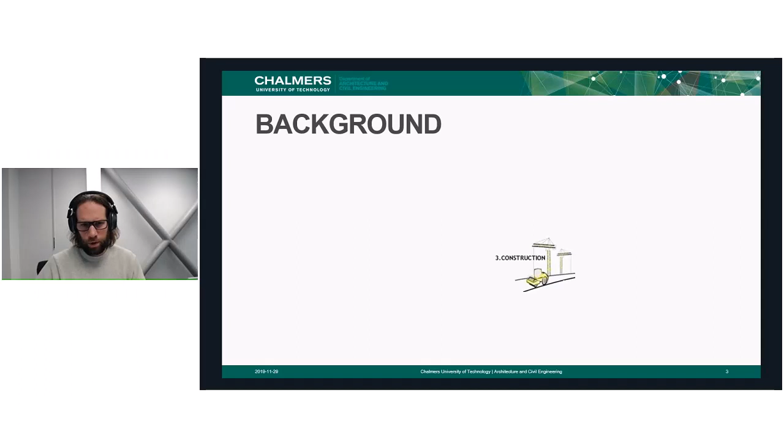Yeah, there's a bit of a glitch in the slide. I don't know, because the thing doesn't show up the way that I was hoping for. Yeah, now I think it's showing. Okay, but just go back to slide number 2. Yeah, because the problem is it doesn't follow the same graphs that I was hoping for. It's a bit weird. Anyhow, hope it's gonna be okay.

So it's hard to imagine a day with no road infrastructures. They are so important for us that their inexistence would paralyze the existence of our society and civilizations. Therefore, a high amount of investment every year is allocated to sustain the existing infrastructure to assure that we get the service we need. Beyond that, fresh investment every year is allocated to upgrade the system and create added value to the existing infrastructure that we have. However, due to constant need for construction and maintenance activities, a high amount of natural resources is extracted from our finite planet, and down the road more materials become scarce. Due to these constant maintenance activities, more waste is generated that pressures our ecosystem. Therefore, it is very important to take a systematic approach, aka life cycle thinking, to assure that we tackle all these aspects and avoid partial thinking and problem shifting later on.

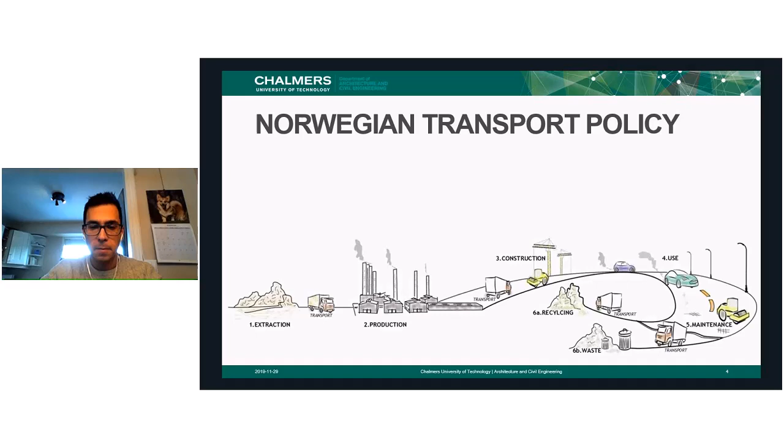Do you all have it? Yes, you can see it clearly now. Okay, perfect.

Norway is a country of about 5.3 million people, and the majority of the population is located around the coastal area. Road infrastructure plays a fundamental role for Norwegians to get closer together, and having a secure and effective road infrastructure supports the socio-economic activities in Norway. As a matter of fact, about 88% of the transportation in Norway happens on road. Over the last years, the road network has expanded continuously, and at the moment we have a total length of 93,000 kilometers of public-owned road.

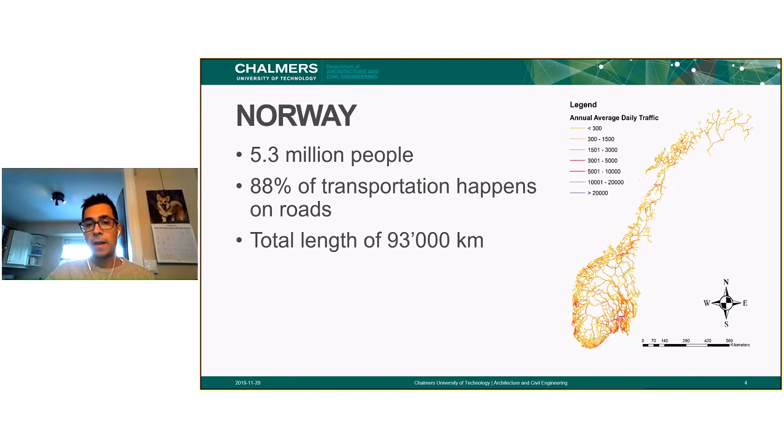Due to the importance of road infrastructure, the Norwegian government also aims to spend a staggering amount of Norwegian kroner over the period of time to assure that they increase the safety, efficiency, and effectivity of the transport while modernizing the infrastructures. They focus on different areas, but regarding environmental concern, the government likes to cut carbon emissions by half by the end of 2030, and this should be achieved from both construction and maintenance works.

Beyond that, due to the constant expansion of the network and increasing technical requirements, road infrastructure hasn't been maintained as it should have been. Because of that, the maintenance delay in the network has increased, and this is one of the aims that the government hopes to achieve in the coming years: to close the gaps and reduce the maintenance backlog or maintenance delay in the network.

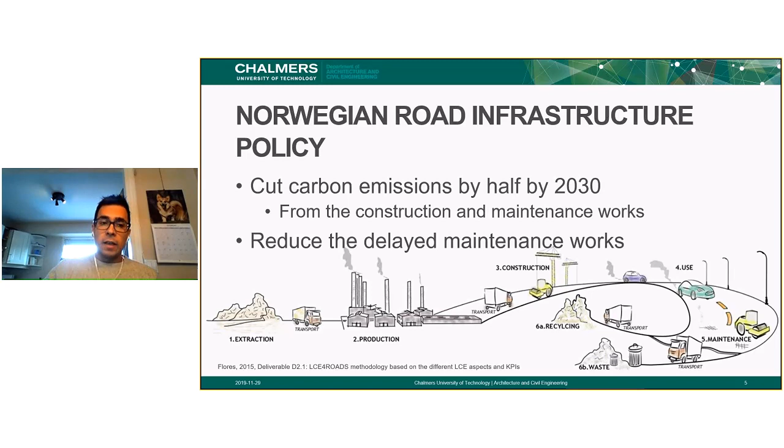The aim of this research was to explore and gain a deeper understanding of the life cycle of road infrastructure, and at the same time apply a systematic approach and propose solutions that close the research gaps. This has been done using the Norwegian road network as a case, while trying to keep the results as generic as possible so they can be used for other cases.

In order to reach the aim of the study, I carried out literature studies to see what the missing points were. In doing so, I was using research in the domain of environmental and economic assessment of road infrastructures, and tried to find areas that have high potential and create added value for future research.

Looking at the environmental impact assessment of road infrastructure, LCA has been used for almost two decades, with studies using different approaches to showcase results. Over time, the resolution of LCA has increased significantly due to better representative data. However, prior studies tend to use generic data showing industry average data on a global scale while presenting impact assessment for a particular local case, meaning they were using global data to show a local problem.

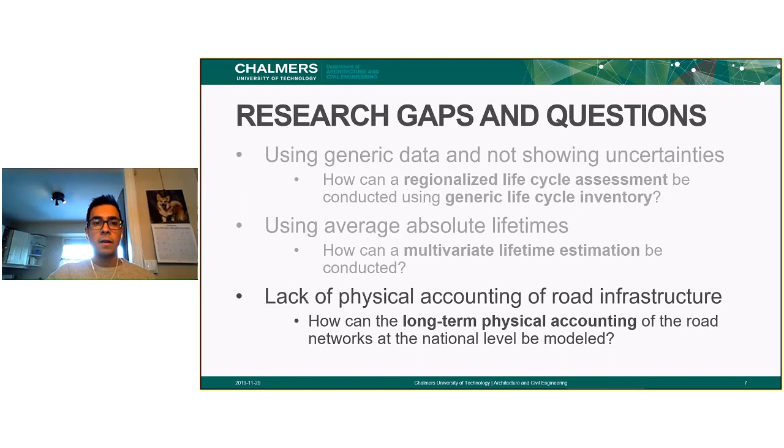To scope the research, I focused on certain areas for the life cycle assessment. When I wanted to show how we can create a regionalized life cycle assessment among different product systems, I focused on construction materials. There were various reasons I picked construction materials as a product system to show how regionalized life cycle assessment can be done, and how we can address the uncertainties.

Construction materials, if you look at the literature, are responsible for about 15 to 30% of climate impact. At the same time, these impacts are directly related to operations during earthworks, such as cut and fill and transportation of materials, and they also contribute to embodied impacts when we are quarrying materials.

If we think of minerals used for construction of road infrastructure, we can see that construction machinery accounts for about 50% of the impacts embodied in producing minerals like aggregates or other materials.

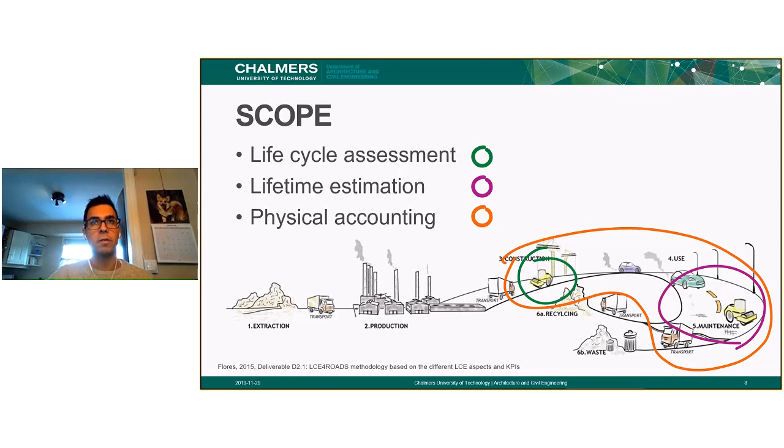Regarding physical accounting, which was about how much material we have in the network, I looked at the whole value chain from construction material usage and end of life through to maintenance activities. We focused on that domain while looking at the entire road network in Norway.

To answer the first research question—how can a regional life cycle assessment be conducted while using generic life cycle inventory—we were fortunate to have access to nice data compiled by the Norwegian Association of Heavy Equipment, showing how construction machinery has been operated in Norway.

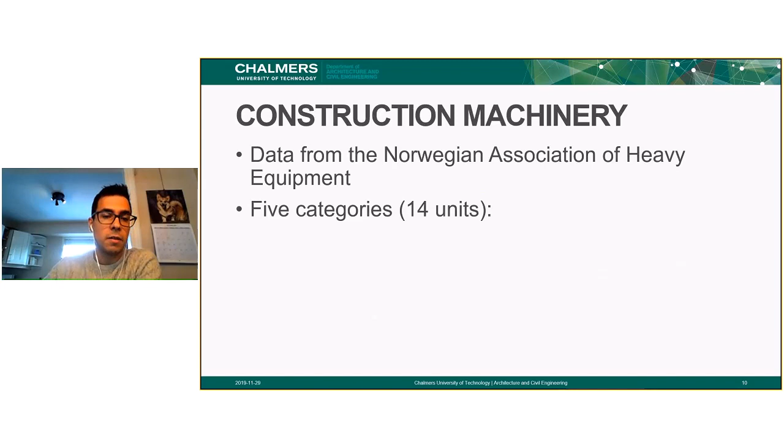There were many machinery types, but we focused on 5 categories of road construction machinery, and in total we looked at 14 units. These construction machines were: articulated hauler, motor grader, wheel excavator, wheel loader, and crawler excavator. So these were the 5 categories that we looked at.

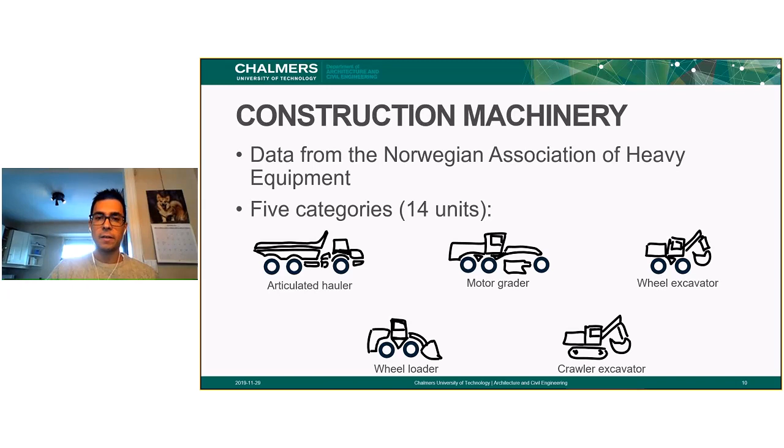When performing the life cycle assessment, we decided our system boundary was from extraction of raw material to pre-manufacture, and transport of material to the factory to assemble the construction machinery, until the time they are decommissioned and need to be disassembled for waste management at the end of life. Meaning we carried out the full life cycle approach, from cradle to grave, of each construction machinery.

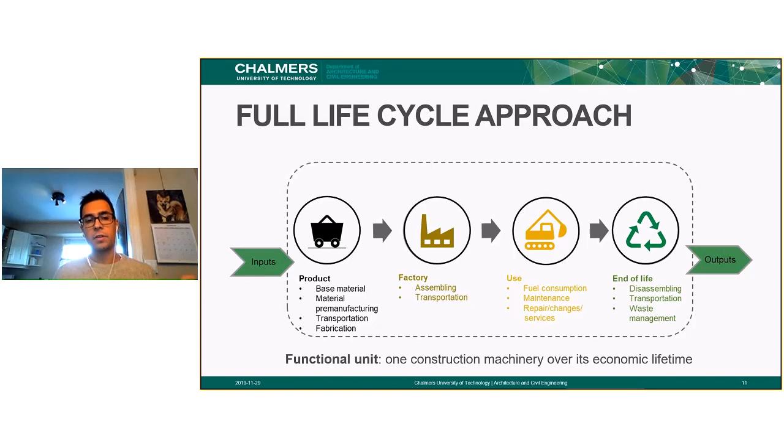The functional unit we used was one construction machinery over its economic lifetime. This functional unit was used to show the total impacts of the construction machinery for each type.

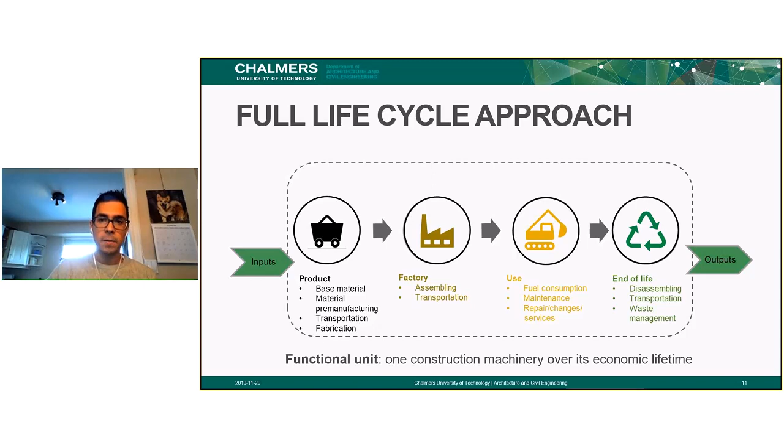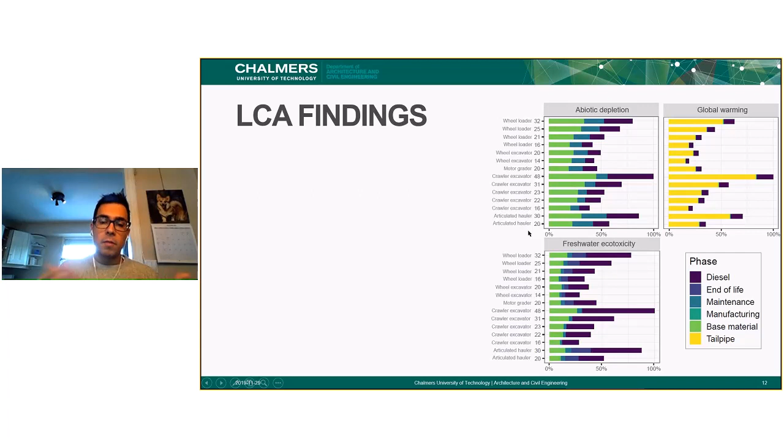By going into the results, we saw that the weight of machinery has an impact on the total impacts that come from a machinery. In other words, if we have a higher operation weight, we have higher environmental impacts. You can see that an excavator which is 48 tons has in fact higher impact compared to the lower operating weight construction machinery. The reason for that was related to having the higher mass of materials used, and also the higher engine capacity that this construction machinery had. Which brings us to the next point.

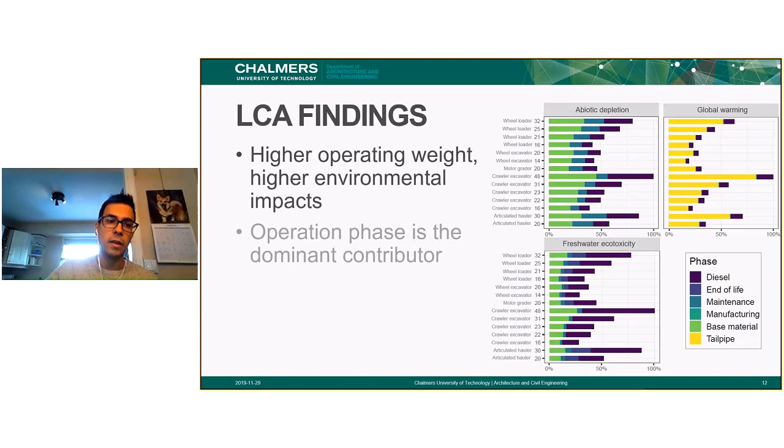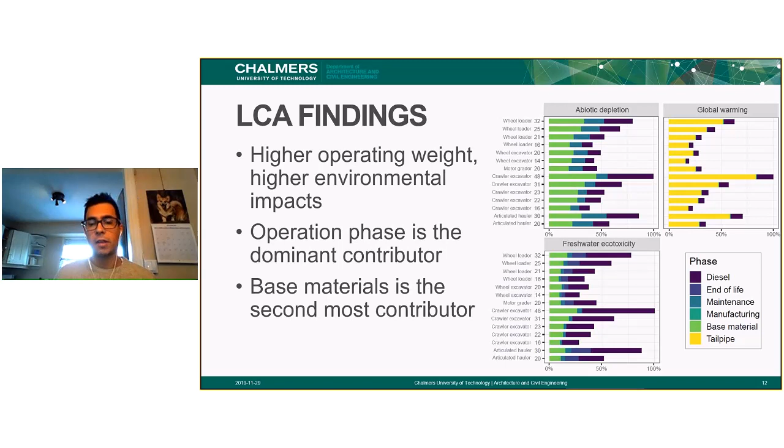The operation phase showed that it was in fact the dominant factor among all impact categories we were focusing on, meaning that the amount of fuel used and the tailpipe emissions in the total results were the dominant phase of a construction machinery causing the high impact over the full life cycle of each construction machinery. However, base material was the second most important contributor, due to the assembly of the materials and also the sequential repair and services needed, like changing parts, filters, oil, etc.

However, in this study, we also found that the end of life phase, which is often discussed as the least important phase of a construction machinery or any kind of product because there isn't much going on there, depending on the scenario we use for how waste material needs to be treated, the end of life phase might have a contribution.

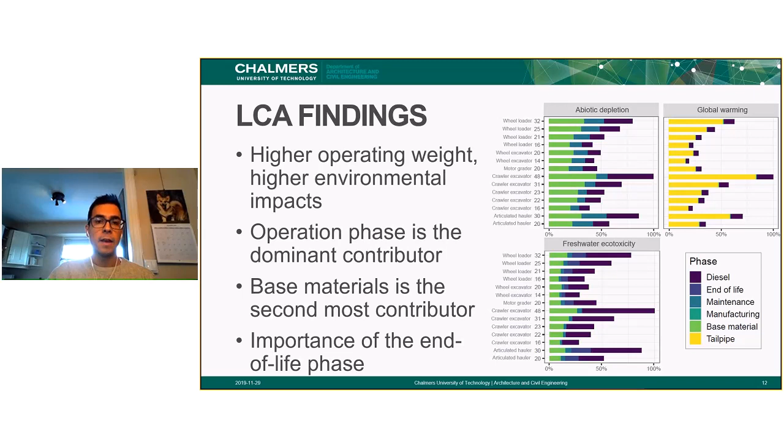Here we can see the freshwater ecotoxicity, because of the scenario we use, has a contribution from end of life of material. In the assessment, we consider that at the end of each tire's life, when the tire is worn out, it is used as an energy source for producing cement. Because of that kind of scenario, we can see that the end of life phase is not insignificant with respect to the impact, and has a contribution over the full life cycle of the machinery.

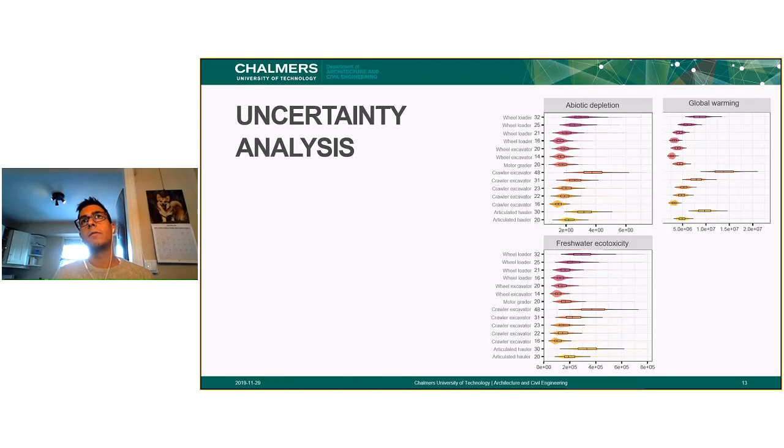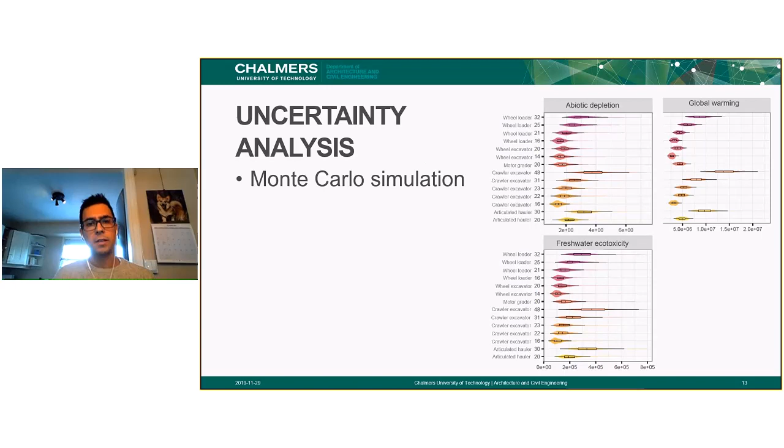And more than that, we were thinking of carrying out an uncertainty analysis to show the accuracy and reliability of our assessment. In doing so, we did Monte Carlo simulations for all of these machines, and we iterated over 1,000 times.

Here we show the results, the same table but from another angle. We show the total impact with respect to each construction machinery, using box plots and kernel distribution plots to show the intensity and probability of the impacts. If we look at the median value of these impacts, which is the middle of the box plot, we can still get to the same conclusion that the heavier the machine is, the higher impact it has.

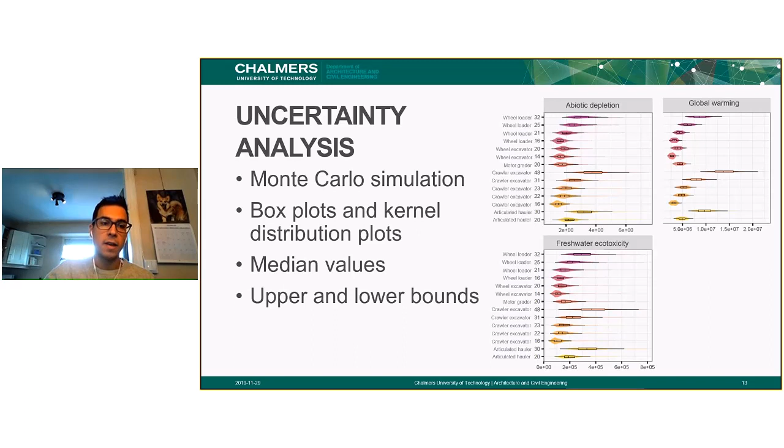However, if we look at the upper and lower bound of each distribution, we cannot say with 100% certainty that the heavier a machine is, the higher impact it always has. Meaning that with some percentage of certainty, we can say a particular machine is often having a higher impact. This brought me to the point that performing uncertainty analysis gives us an opportunity to look at the picture from another angle.

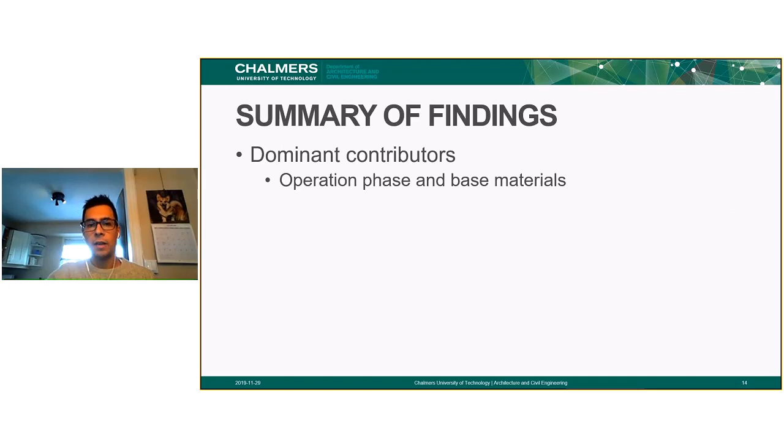And say how certain we are with these kinds of single values we provide in the impact assessment. To summarize our findings, the dominant contributors in this study were the operation phase and base materials among all impact categories. It was also an important finding that carrying out a full life cycle assessment gives us a better picture, and with respect to the scenario we pick, inclusion of the end of life phase actually matters, because it gives us a better picture of how waste treatment might impact the whole lifetime of the product from a full life cycle perspective.

And also, we found that it is necessary to perform the uncertainty analysis to get a better picture of the reliability and accuracy of our decisions when determining what the impacts associated with the product would be.

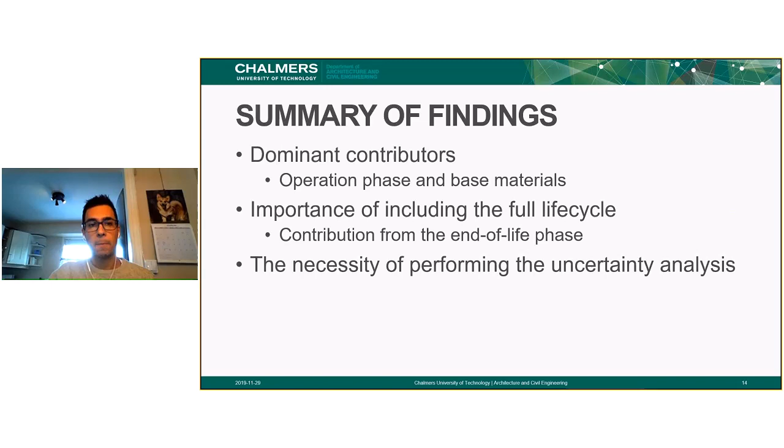Regarding the second research question, that was how can a multivariate life cycle estimation be conducted? Well, we focused primarily on pavement materials, or more specifically only asphalt bituminous material. We focus on only the estimation of these kinds of material.

The approach we took was collecting data. First, we needed to do the data engineering, because we used data from the Norwegian road depository, the road data bank depository, to prepare the data for post-processing and statistical assessment. I did the fetching, cleaning, and merging of different datasets from this depository that I had access to. I also used spatiotemporal analysis to overcome some of the limitations embedded in the database, to join and harmonize the data.

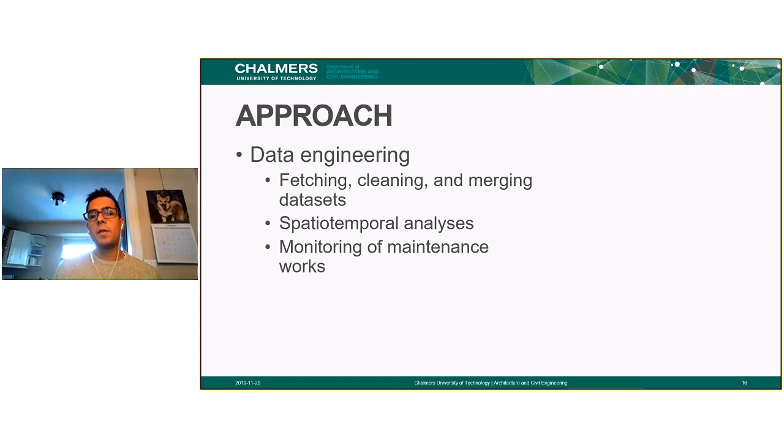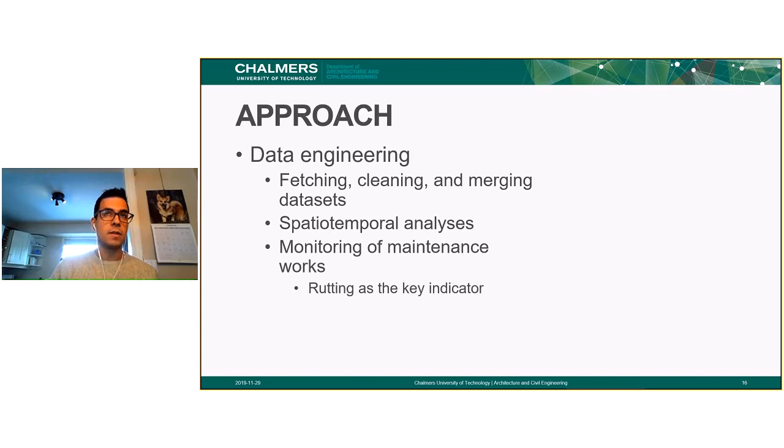I also monitored the maintenance works. There were some issues with the database, because not all maintenance activities have been registered in the Norwegian road database. So in order to monitor how maintenance activities have been done over the last couple of years, I used a specific measure to cross-validate the recorded maintenance activities. The variable I used for cross-validating the recorded maintenance was a pavement distress measured by the Norwegian Public Road Administration, which was Rutting.

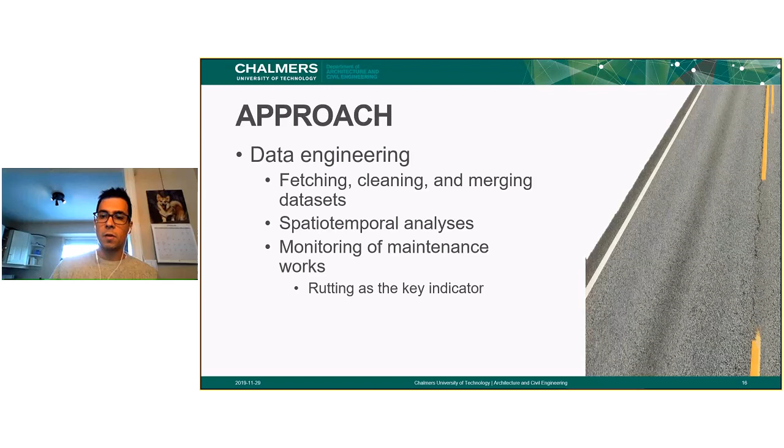If you do not know what rutting is, if you look at the road, rutting happens. It's a distress that creates a deformation on the pavement with such a profile, and happens across the wheel path of a road. You can see it in some roads, some are very severe and some are not so severe.

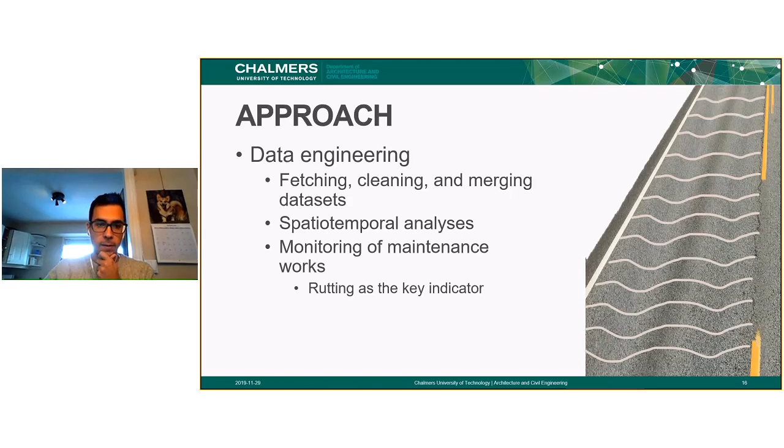That was a response variable. This rutting was a response variable that we used to cross-validate the recorded maintenance activities. For the statistical model, I used survival analysis to estimate lifetime, and among different survival models, I used the Cox proportional hazard model to do the semi-parametric analysis of the data.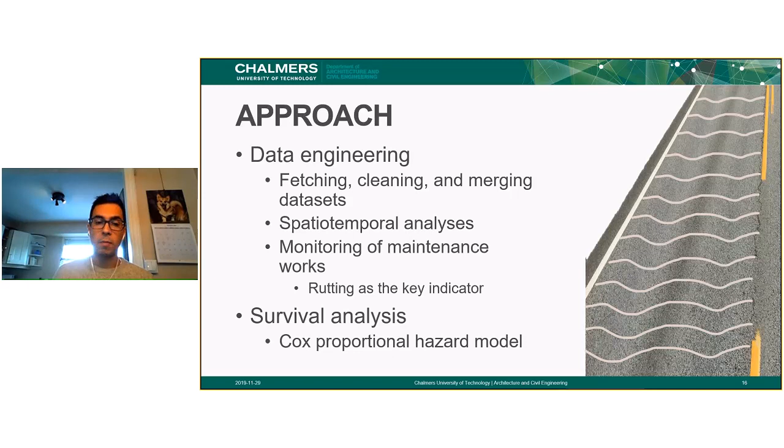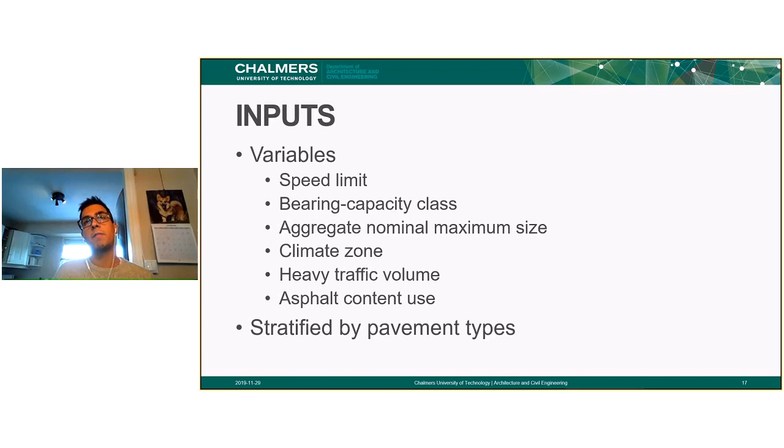Various inputs were considered. This was a regression model, so I used different variables to check the effect of different factors on the lifetime of each pavement. These were the variables I considered, and I also stratified my assessment, meaning I grouped each assessment based on pavement types, comparing each pavement's performance relative to each other.

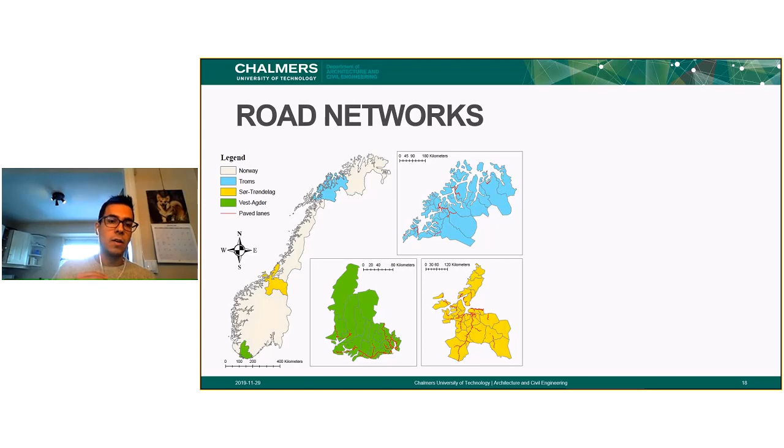The data I collected came from three counties in Norway: Troms, Sør-Trøndelag, and Vest-Agder. I picked these counties because of the considerable climate difference. If you look at the average outdoor temperature for these three counties over the last 10 years, you can see they have almost a 4 degree temperature difference.

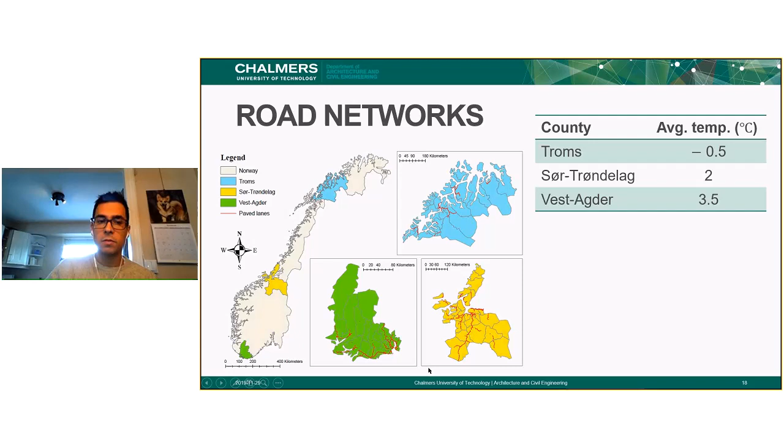There were also different road networks in the system. The red paved lanes are the roads I considered for the estimation of lifetime. These roads were chosen based on an annual average daily traffic that fell between specific ranges.

I chose these roads because rutting was shown to be a very good indicator—rutting is a pavement distress that happens in roads within this range of traffic volume. More than that, I classified the roads with respect to classes introduced by the Norwegian Public Roads Administration.

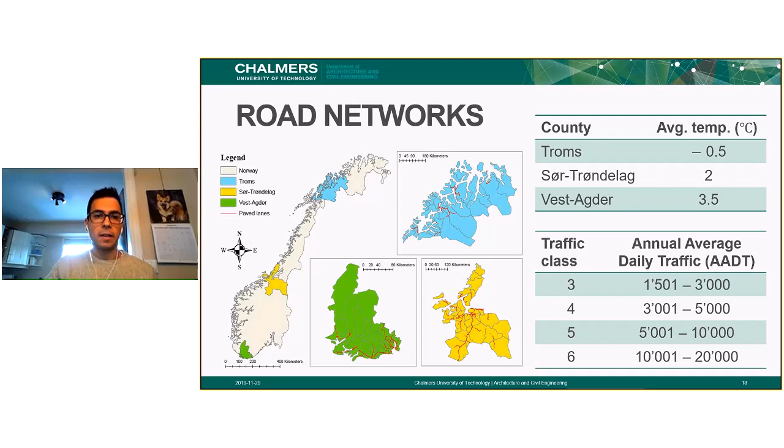So what do the actual results show? First, I wanted to do the non-parametric analysis, to show how maintenance activities have been done, meaning what the maintenance records were. I also wanted to look at the technical requirements set by the road directorate, to see how much sooner maintenance should have been done—meaning what the gap is between technical requirement and maintenance records.

If we look at the mean survival probability and the difference, we can see that maintenance activities have been delayed for almost 2 years for each traffic class, relatively. This aligns with the Norwegian National Transport Plan, which discusses delays in maintenance activities. We can also see that if we follow the technical requirement, we should have maintained the roads at least 2 years earlier than what we actually did.

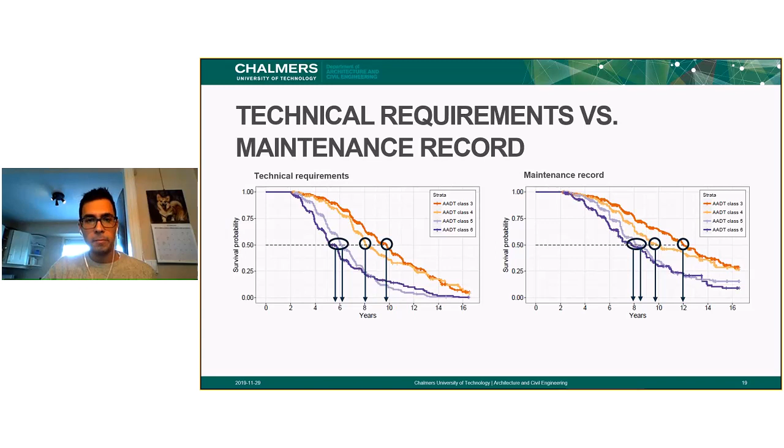Another finding, from the Cox proportional hazard function, was the effect of different variables. The variables that were constantly significant across all traffic classes were aggregate nominal maximum size and heavy traffic volume—meaning these two variables consistently showed a low p-value across all classes.

However, I saw some uncanny results in the data. If you remember, one variable that I considered was a speed limit. Sometimes in one traffic class, increasing the speed limit resulted in a shorter lifetime of a pavement, but often the opposite also happened, and sometimes it was really unproportional. So the profile of the increase or decrease in the speed limit did not match the expectations. So therefore, we used another explanatory variable to see what is the reason for it.

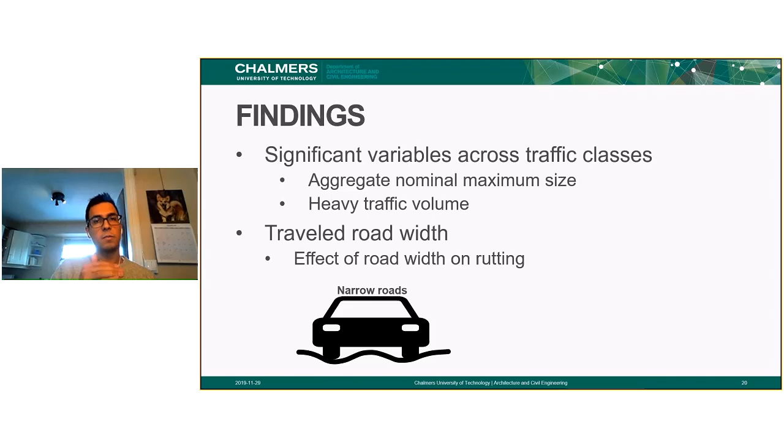After a discussion that I had with the road directorate, it became clear that it might be due to the traveled road width. And therefore, I considered this variable to dive deeper into the data. And surprisingly, we could see the effect of road width on rutting, meaning that when we had a narrower road, the depth of a rut profile gets deeper and narrower. And when we have a wider road, the profile gets more relaxed, the depth is shallower, and the spread and width of a rut is also wider.

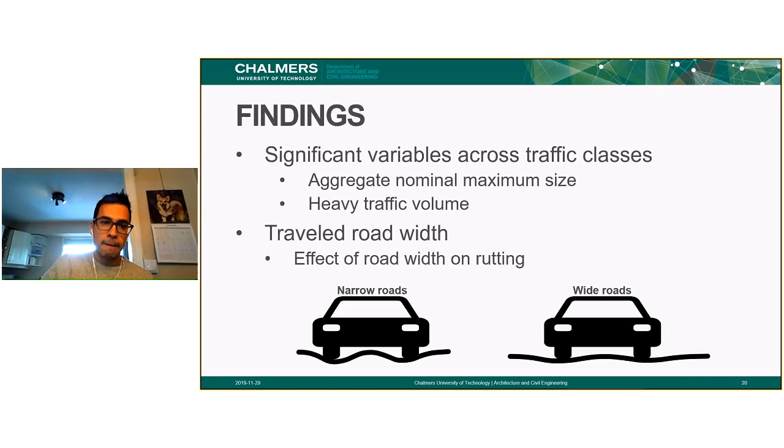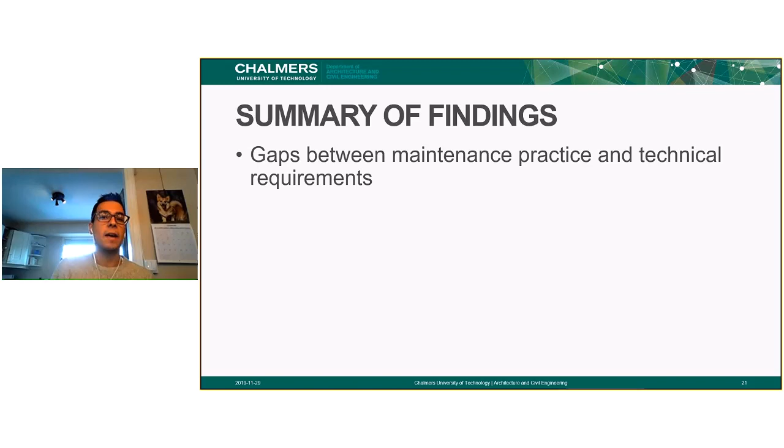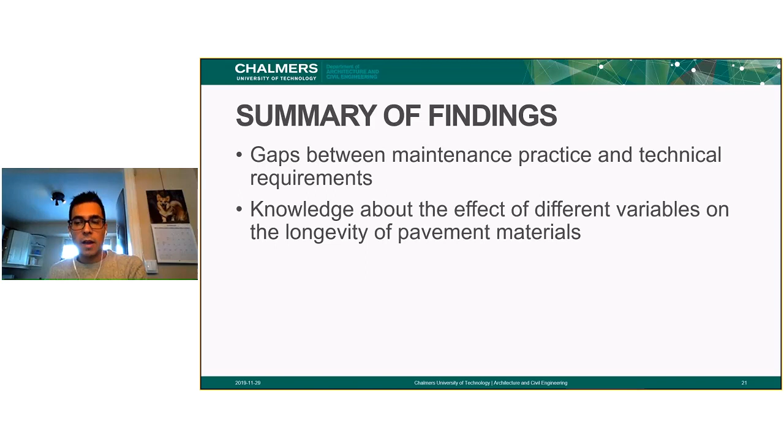To summarize the findings, we were able to show the gaps between the maintenance practice and technical requirement. Based on the model and the data cleaning, we could show what the gap actually is between the maintenance practice and technical requirement. And also we were able to see the effect of different variables on the longevity of pavement materials, and to get a better understanding about the lifetime of the materials, when we are using these values later on for any kind of assessment and having more robust decision making.

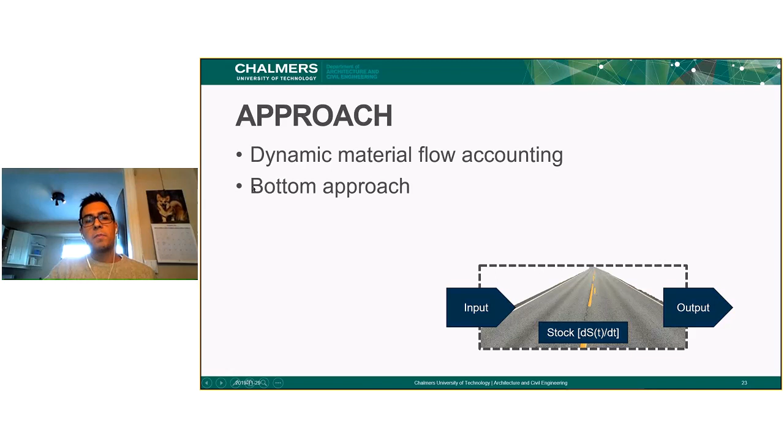Going to the third research question: how can the long-term physical accounting of the road network at the national level be modeled? In doing so, we decided to carry out dynamic material flow accounting. Flow accounting in the sense that we wanted to follow how much material goes into the system, goes out of the system, and how much stock we have. A stock here is the position of material over time. And by dynamic, we mean the relative changes in the amount of stock, meaning how much is being added or left from a system throughout the time. To do that, I used a bottom-up approach, meaning that I collected information from all the road networks in Norway and aggregated all the information to show how the stock is on the network.

However, there are many roads. Here I just focus on three categories of road that the Norwegian Public Roads Administration is responsible for: European road, national road, and county level road. So in total, about 55,000 kilometers of road was studied in this research. And more than that, I focus on the retrospective and prospective. Retrospective in the sense of how the road network has grown over the period of time until the present, and prospective, meaning how the material consumption might be in the future. So retrospective looked into the past and prospective looked into the future.

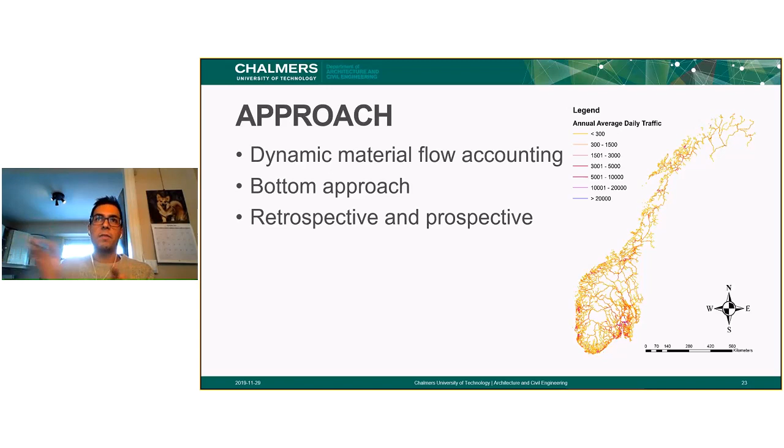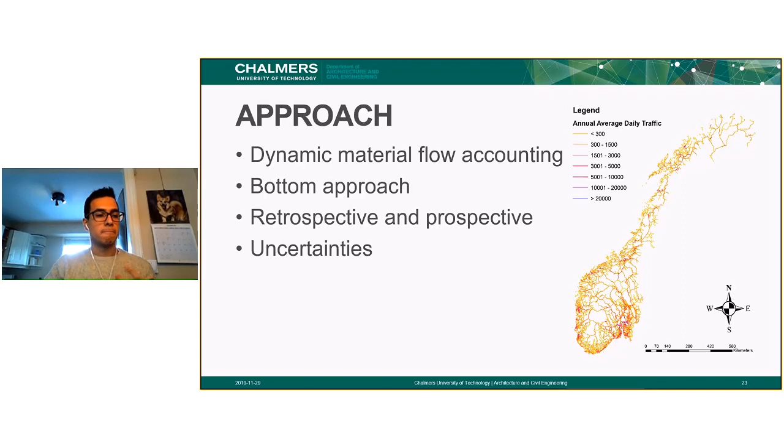The period of assessment that I considered was from 1980 till 2050, and I had data up to 2017, meaning that for the retrospective I considered only 37 years, and for the prospective it was 32 years of analysis. And I also considered uncertainties to avoid providing single values. So I wanted to carry out uncertainty analysis of the data to show the reliability and accuracy of the data.

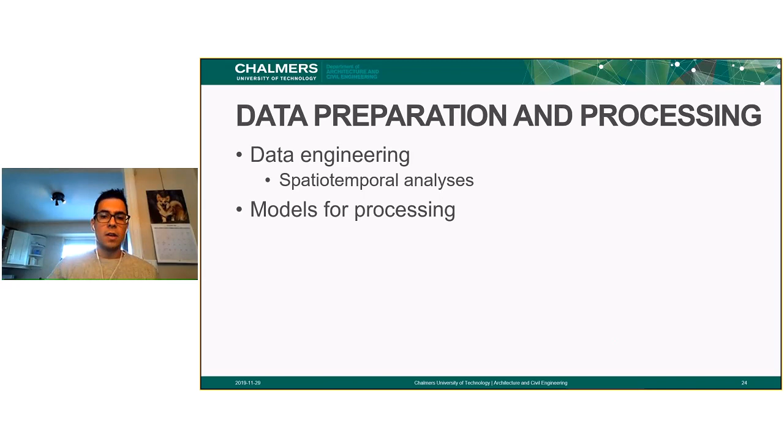Like the previous research question in lifetime estimation, I needed to collect the data and do the data engineering. Here was massive data engineering, doing a spatiotemporal analysis to prepare data for post-processing. In the post-processing, I used different kinds of models. One of them was a classification and regression decision tree model to predict the layer composition of each road section. I used this decision tree model to train on the data and then predict for the other sections that we didn't have information for, with respect to different variables that I considered.

Other than that, I considered fitted survival analysis based on the knowledge that I attained from the previous research question, lifetime estimation, with respect to various variables. I was able to carry out a survival analysis and fit a distribution model to see what is the probability of material with respect to their longevity. And more than that, we used empirical pavement wear, meaning what is the effect of tire-pavement interactions and how long pavements would last in our system, how pavements are dissipated from our system.

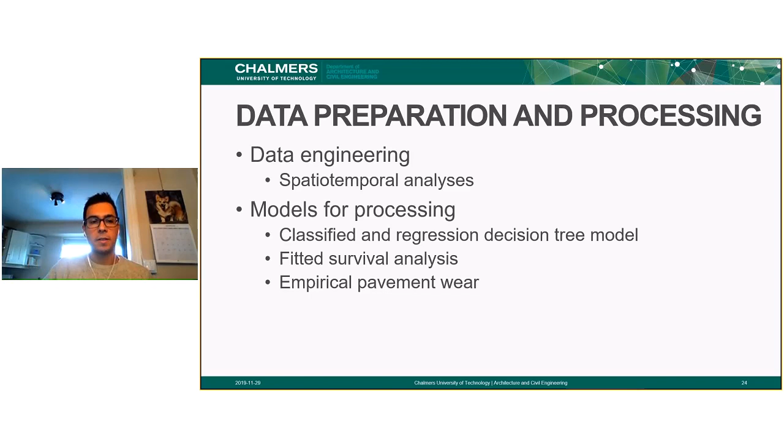And beyond that, I consider different scenarios: 0%, 1%, and 2% annual increase for the traffic volume for each section, meaning how the increase in each section under different scenarios would affect the maintenance requirements. And I should say that for the prospective, I did not include the effect of expansion of the network because I did not have any information about it.

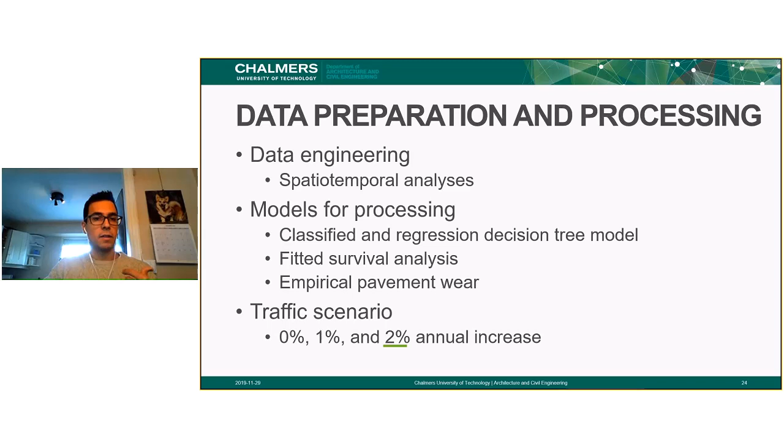But the prospective here only focused on the preservation of the network, meaning that we consider periodic maintenance activities that need to be done on each pavement section. And more than that, the results that I'm going to show are for the 2% annual increase scenario.

So the retrospective, like I said, was between the 1980s and 2017. And this is what the results show. Here, the blue bar chart is how much material was input to the system. The yellow bar chart means how much material left the system, and the red line is how much the network expanded with respect to the material.

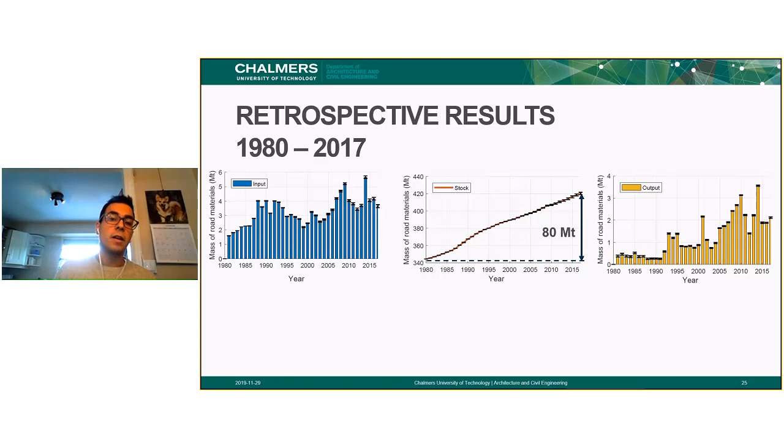And if we look at the difference between the 1980s and 2017, we can see that the amount of stock in the network increased by 80 megatons. And the reason for that was the maintenance work, meaning that maintenance work was responsible for 3/4 of the total growth in the stock, and the rest, 1/4, was due to the expansion of the network during the same time period.

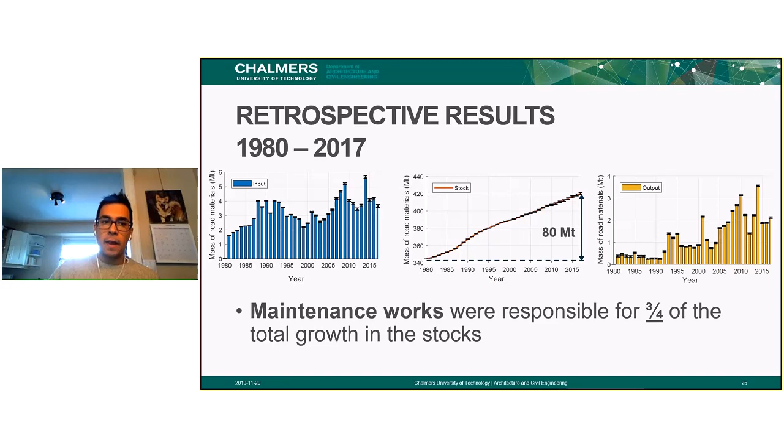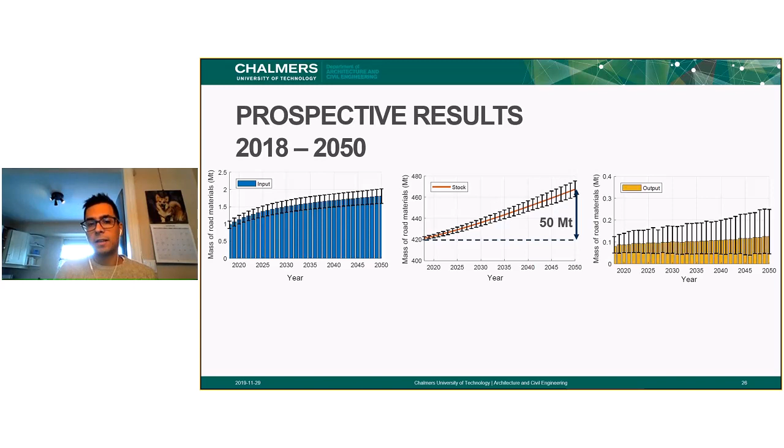And when we look at the prospective results, from 2018 till 2050, we can see that over 32 years, it is expected that the amount of stock would increase by 50 megatons. And as I said, maintenance works and pavement wear were the only variables discussed in this analysis, meaning that we did not consider the effect of network expansion, rebuilding and reconstructing, or building new roads in the system.

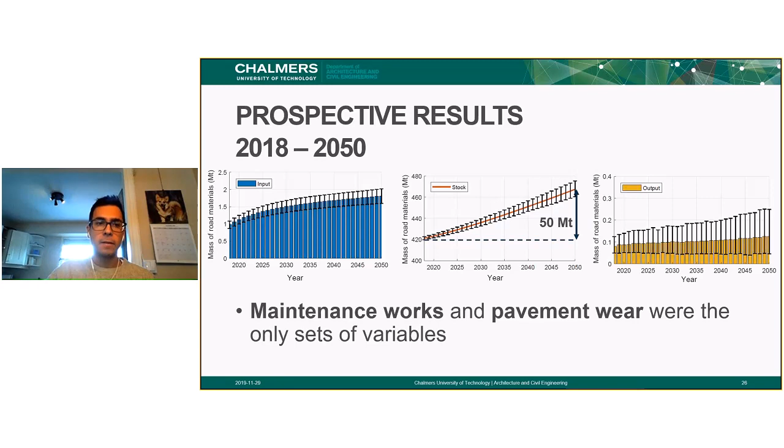And to summarize the findings, the material stocks of road infrastructure would continue to grow, and maintenance work showed to be the main contributor. Based on the retrospective results, 3/4 of the impact was coming from maintenance activities. And because of the current condition of infrastructures and the importance of road infrastructure, maintenance activity would still play a fundamental role in the consumption of raw materials, like minerals or any kinds of bitumen.

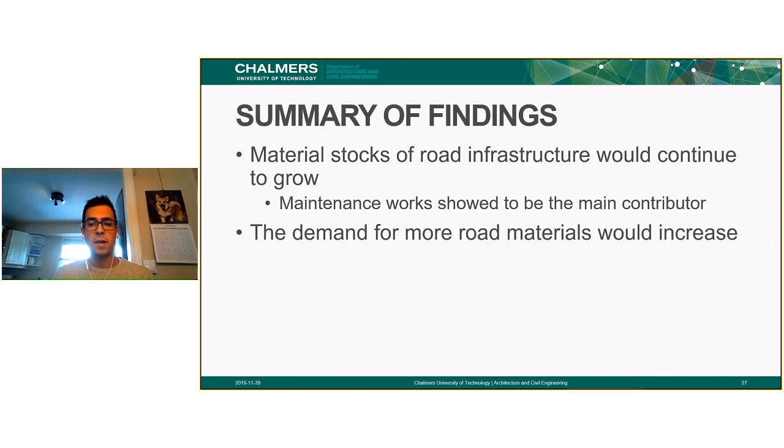And more than that, we saw that the demand for road materials would increase. Due to the constant growth in maintenance activities, and if we probably have road expansion, we definitely need more material for expansion of the system.

To conclude the results and findings from these 3 research questions, this research recommended approaches based on the gaps that we found within the scientific literature, and also the potentials we found with respect to the Norwegian road infrastructure policy through the National Transport Plan.

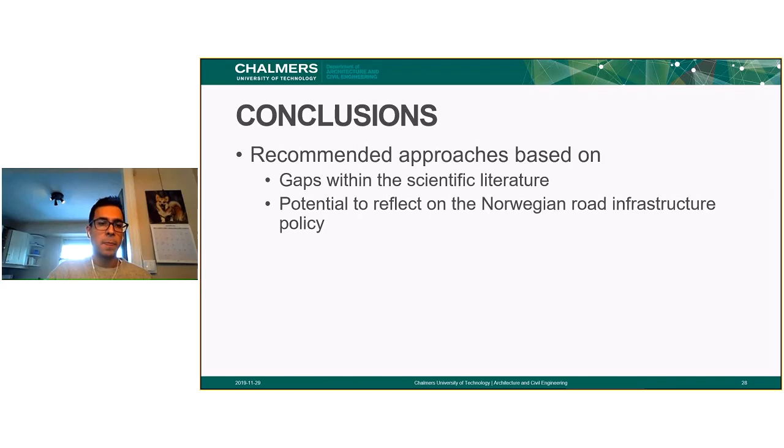And for that, we focus on the life cycle assessment of construction machinery to show how we can create a regionalized study while showing uncertainties, and we focus on construction machinery because it is a key element that we can use as a baseline when using other scenarios to achieve the 50% cut in climate impacts from construction or maintenance activities.

And more than that, we use the estimation of pavement lifetimes to first show how it's possible to estimate the lifetime of materials, and second, to improve the robustness of the analysis and improve decision making.

And also, we use this modeling of long-term physical accounting to get an idea of how much material actually exists in the system. And if we're going to do urban mining in the future, we get some idea of how much material we have in the network, and maybe we can reuse, recycle, or repurpose this material for other kinds of construction activities later on.

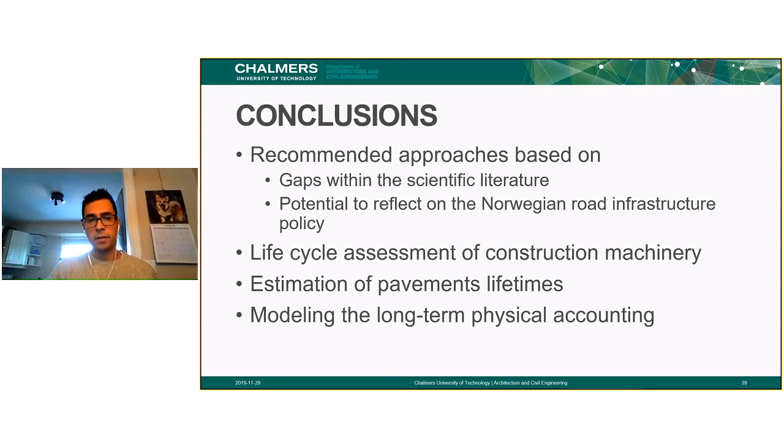This study wasn't without any limitations. I should say that here I only focus on open road infrastructure to answer these research questions, and also I focus on the current state of road infrastructure. So I didn't consider any modern cutting-edge technologies that are still on a laboratory base. What I considered was the current practice in road infrastructure construction and maintenance activities. And also I use different methods and models.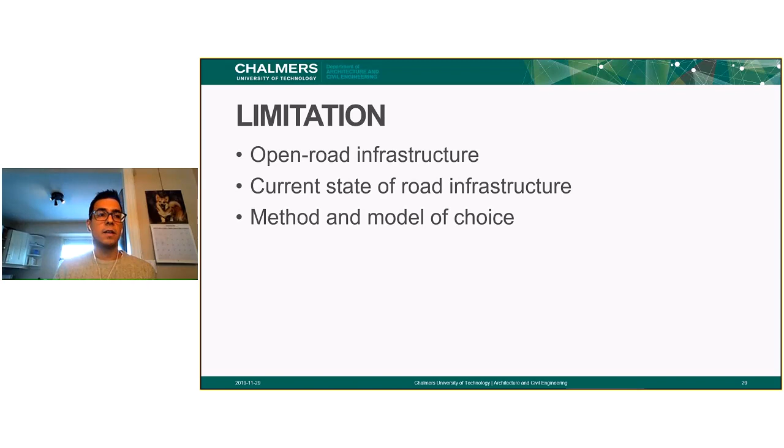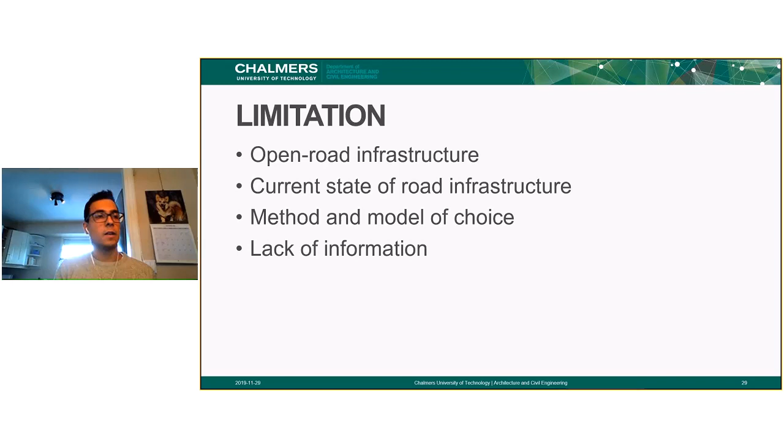However, there are many more that can be considered. These models and methods that I chose were based on the literature, their significance, and the potentials that I observed through the literature. And also there was some lack of information that stopped me from doing more. So because of that, I wasn't able to do everything. Like this stock modeling of the road infrastructure, I couldn't do it for the entire road network because the data weren't there, or we didn't have enough information to carry it out.

But about future research, I should say that life cycle assessment has been done for a while, and it becomes more prominent in the future. However, the current LCA study is incapable of integrating risk assessment. This is due to the inability of LCA to capture the availability of abiotic resources from the site of production. The current LCA study can show the consumed mass, energy, and geological depletion, but it is incapable of showing the supply side risks.

To answer these limitations in the current LCA study, it might be beneficial to consider the economic scarcity potential or geographical supply risks to increase the reliability of the LCA study that we are carrying out. More than that, it's going to be very important to perform optimization studies to answer these multi-objective issues that we always have. We want to reduce the cost, reduce the maintenance, while improving the quality of the network, and so on. It's really important to carry out these kinds of mathematical models to get the most optimum for the money spent.

and show how the maintenance activities can be done more from a network perspective. That's what I'm hoping to achieve in a short time, to actually show the potential of my results and findings in a small deliverable. Well, it sounds very interesting, and I wish you good luck with that, and I look forward to seeing the results from that as well.